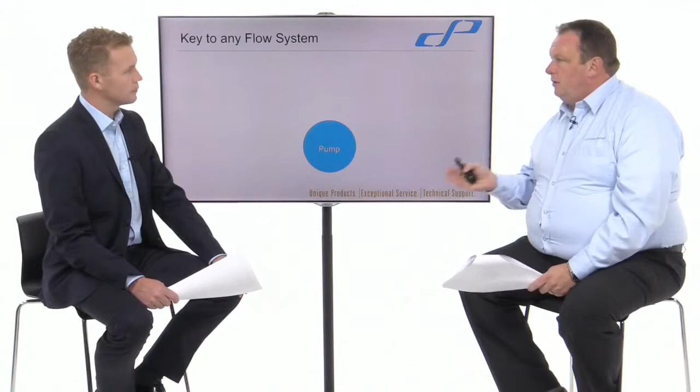All right, brilliant. Okay, so what is a pump in basic terms? A pump is a way of moving a liquid from one place to another. So you'll have a start point, be it a tank, a container, a river, or a reservoir, and then you want to move that product to somewhere, be it the toothpaste tube, be it the coffee cup. The pump is the means and the heart of it that moves that liquid across. It's the technology that enables us to move that liquid.

And I talk very broadly about the liquid as well, because I've already said we have water, which is a very fine, easy liquid to move. We have various chemicals, and we use those chemicals to make up everything we use, from grooming products to foodstuffs. Another fine example is vegetable soup. Back to the toothpaste, to where we want it to be.

Vegetable soup is in the can, toothpaste is in the tube. And it's this pump, this technology, that enables us to have this lifestyle.

Okay, and where does the pump fit into this? The pump, as I say, really is the heart of the system. The pump technology affects how the liquid moves.

If I go back to vegetable soup, when you open a can you like it to be a nice liquid with some lumps of carrot and peas in there. If I use the wrong technology, it's all liquidized as it goes through the pump, whereas if I use the right technology, it's made and moved cleanly to the can and then to your plate. The toothpaste, very, very abrasive, very hard.

So I've just clicked up another slide there to show, because we're going to talk about the suction side. I mentioned we pull the liquid from a point, from a bucket, whatever—we call that the source. And then the route to the pump is the suction pipework, or the connecting pipework on the suction side. Within that, you may want to measure the temperature, the pressure, the flow rate, which is the rate at which the liquid is moving.

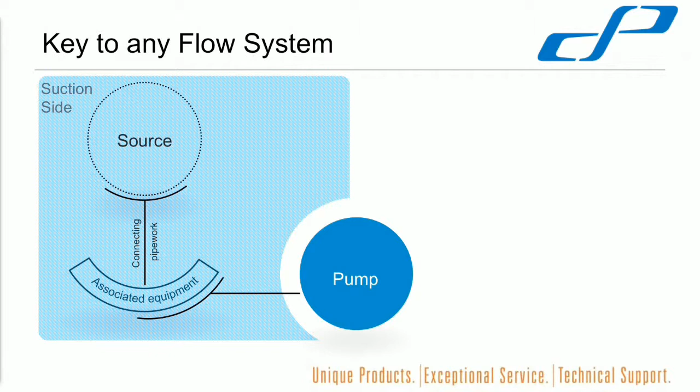You may want to bring it a long distance, a short distance. These are all considerations that we need to look at very carefully when selecting the pump. But that's what we call the suction side. We then come through the pump.

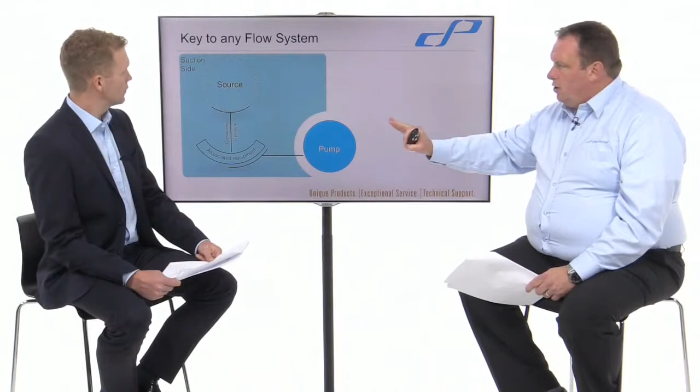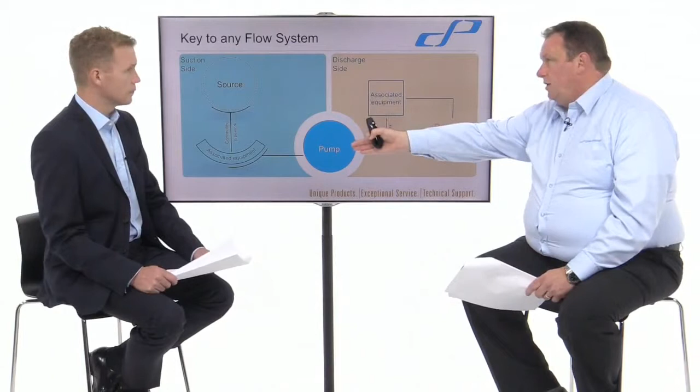And we come to the other side, which is the discharge side. This is where we want the product to be. So if I jump to your coffee machine again, you've got a little water tank on the back. The suction side is pulling it from the water tank into the pump. Then the discharge side is where we want the coffee to come out into your cup.

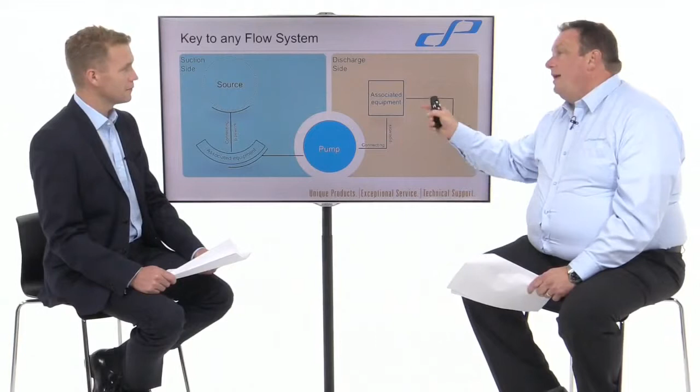The connecting pipework and associated equipment is the point that lets the coffee in to give it the flavour, is the point that heats the water up, is the way that it measures that the water is the right temperature, and restricts the rate at which it flows into your cup. So this is associated equipment on the discharge side of the system.

It's wonderful to break it down like this, because you just look at these machines and think, oh, they work like that—it's fascinating to actually learn about the inner workings. There is a lot more that goes on within the unit than people realise, and this is why I call it the key to any flow system.

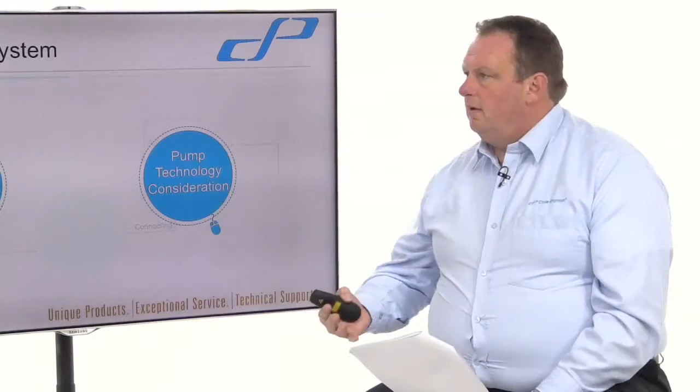So, Colin, what do you need to know to pick a technology? I'm glad you asked that question. It's one of the most difficult points we actually have within what I call the pumping world. There's a lot of times when people aren't sure, or they phone you up and say, I need to pump this. And okay, you need to pump it.

How much do you want to pump? Oh, I don't know. And then you say, well, how quickly do you want to pump it? But if we drill down, we can actually find out—it's four bucketfuls, your bucket is this size, and you want to move that much in an hour. Then we can start to find out.

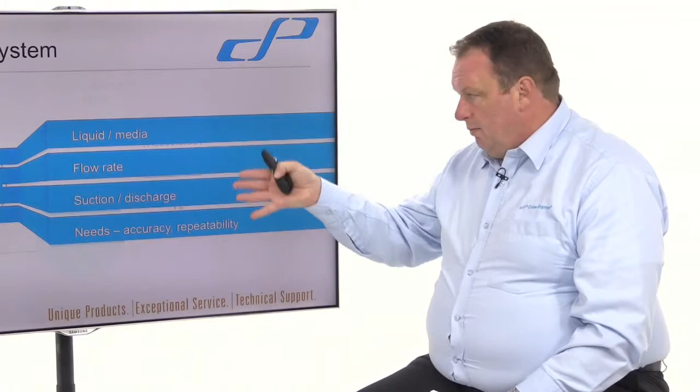But we do tend to go back, if I could take you to the slide, to some core basics. One is the liquid or the media. Now, I was talking to you earlier about examples of liquid or media—we were talking water, coffee, toothpaste, hair products. These are things people understand because they can relate to them.

Foodstuffs have a different way of being treated because you don't want to damage the product, but you need to move it. It may be at temperature.

You then get to oils and things like that, or the chemicals. We are very, very strong within the pharmaceutical industry and within pharmaceutical manufacture with some of our pump technologies, because it gives specific advantages. Theirs are very much recipes, powders dissolved, there's many different things. If you look at chemicals and solvents, these are things not used in your everyday life, but behind the scenes they're very prevalent in what we do.

So the liquid is the first question I ask. And that liquid can also have solids in it. We define it as soft solids and hard solids. We can have large solids, small solids, abrasives. If you have silica in it, which is sand, it's abrasive. If you pump a liquid with sand in, an abrasive, you can wear a pump out because it's used for shot blasting. So we have to look at that.

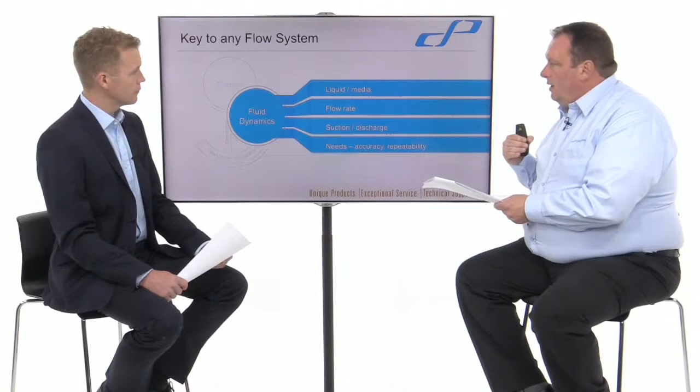Then we move on to flow rate, and this is how much you want to move in your timescale. Some things where you want to move large volumes will steer you towards one pump technology, other things slower, another pump technology. And then going back to toothpaste, very, very difficult to pump, very difficult to pump fast.

Then we move on to what we were talking about, the key to the flow system, the suction and discharge side. So where it's coming from and where it's going to, not just what you're going to put through the pump, but we like to talk about, as I say, the journey, to pick the technology. So it's the source to the discharge point and what you're doing to it in the various different stages on that journey.

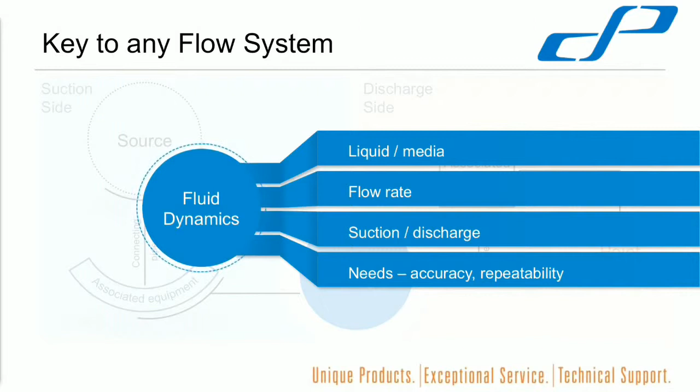And then finally, we go to the needs. We have accuracy and repeatability as two examples here. But the needs are, do you need it to give the same dose each time? Do you need it to give the same size each time? Is that your critical point? Or does it need to arrive at your point at a specific quality?

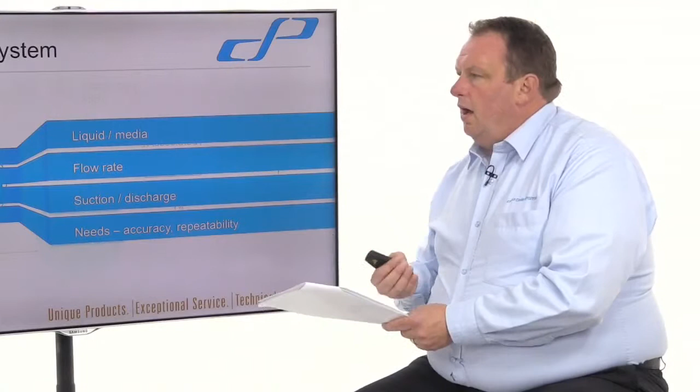If we go back to your coffee, doesn't matter which, but you may like a specific type of ground coffee that gives you a specific flavour. If the pump pumps the water too fast, the coffee will be too diluted, you won't get that strength of taste. If it pumps it too slowly, it'll be the opposite, you won't have enough and it'll be too strong and your cheeks will suck in as you try and drink it. So the pump technology has a very direct effect on what you're trying to do as your end product or your end result.

There are ways we can look at these and ways we can talk the customer through these at Cole-Parmer.

So, Colin, are there other areas that would affect the choice of pump? Yes, we call these pump technology considerations. They are sort of less direct to what the pump's actually going to do, but very important for the owner of the pump, for where it's going. We've listed four of them here.

If you look at one, it's cost of ownership. A lot of people don't realise different pump technologies can give you a very different cost of ownership. Some will use a lot more spares, could have a cost implication in that way, but have very easy maintenance. Some will have a long running life, but when you do actually have to maintain them, they are very expensive because it's what I call back to workshop with lots of components. So we try and engage with, what are you trying to do with the pump? How long do you want this pump to run for?

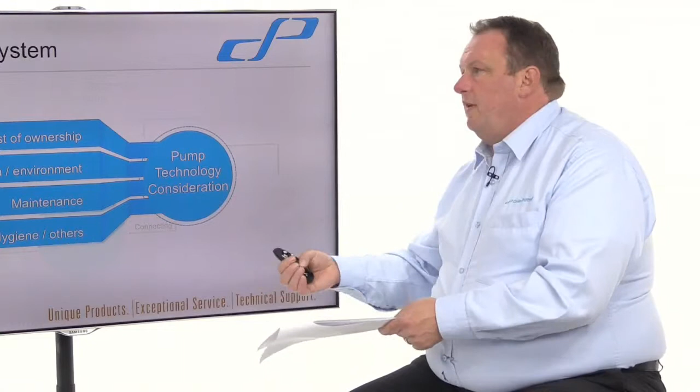If you pick something like the Masterflex Peristaltics, the pumps can actually run for up to 10 years. We've achieved in excess of that. It depends on how hard you use it. But then you have tubing, which is a consumable. If you pick other types of pumps, like some of the centrifugal pumps, they're a different sort of pump. They have a more efficient running, but then when they need servicing, it's a much higher cost. The peristaltic is a very low cost service, there's hardly anything to do. The centrifugal pump is a much higher service cost.

And if you look at progressive cavity, that's also a high service cost, but a long run time. These are all things you will advise your clients when they ask how to spec out a particular system. Myself and the team always talk about and discuss these things.

We also look at the area or environment, because if you've got something going in a laboratory, it's nice and clean. If it's in a production area, it might be washed down. In dairies and milk processing plants, one of their critical cleaning criteria is that they wash down or steam clean products to ensure their hygiene regulations, which are very stringent, are met. If you steam clean something, you may affect the seals, so we have to know this so we can put different sealing arrangements in there.

It could go outside. If it goes outside, it needs a different, waterproof sort of enclosure. It needs to be tougher. Someone might drive into it with a fork truck, so it might need to be more solid. It really can be as basic as that.

And then we look at what we call explosion-proof areas, ATEX, and that's another set of considerations for them.

And then we briefly touched on maintenance, and maintenance is very, very important. There's one type of pump that my 5-year-old daughter can maintain, which is the peristaltic - she just changes the tube. The reason I know this is because I left a pump with a tube in the dining room and came back, and she was opening it, taking the tube out, putting it in and closing it. So maintenance can be that easy.

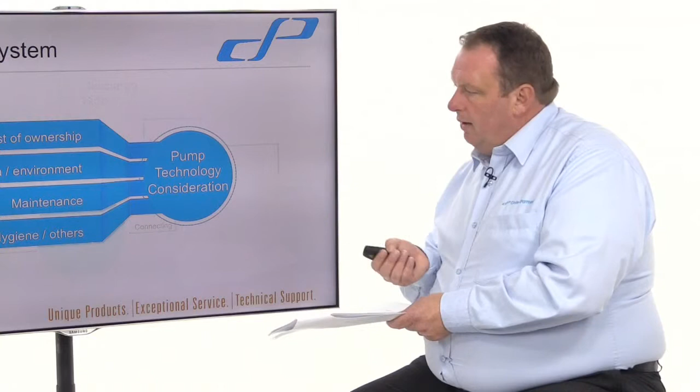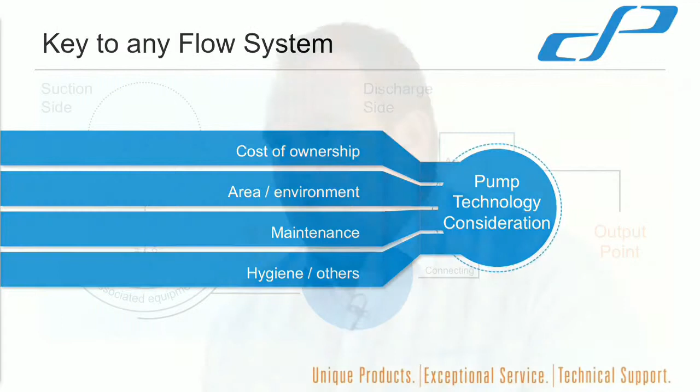And then we have hygiene and others. We say hygiene because a lot of food equipment has very critical regulations for bacteria growth testing and such like. So you have hygienic pumps with hygienic connections - it's not just a food grade material, it's a fully hygienic material.

Understood. Okay, so what's next? So...

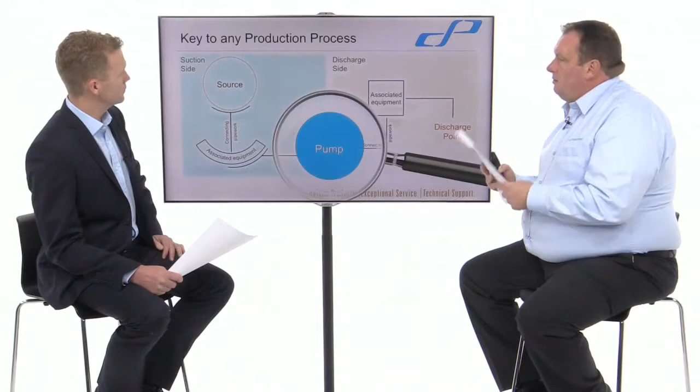Coming back to my slide, we're talking about selection of the pump - the suction side, the discharge side. The thing is, it's the whole technology, it's the whole process. And what I try and do is say to people, it's not just the pump, it's the whole system.

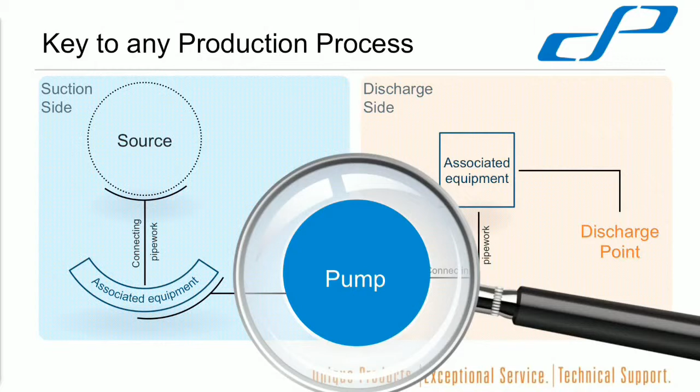With this training, we go on to talk about some of the systems we can offer, or some of the pump technologies we can offer from Cole-Parmer, with the pump at the heart of the system. So Colin, that was the key to a pump system, from the suction side into the pump, the discharge side, and the things a client needs to consider when choosing the right pump. But I guess that's where Cole-Parmer can really help them out. Our team is there to help them select, but those are key points and questions we will be steering towards and asking, because the pump is, as we say, at the heart of the system.

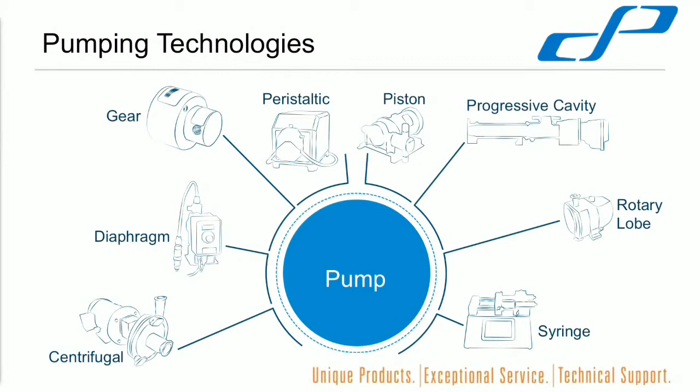The next stage for us is to talk about the technologies and where these then fit into that system. This is a slide we have to show some of the technologies available at Cole-Parmer. Based on those considerations, you can now choose which video you would like to watch, so that Colin and the team will explain exactly how they work. See you in the next videos.